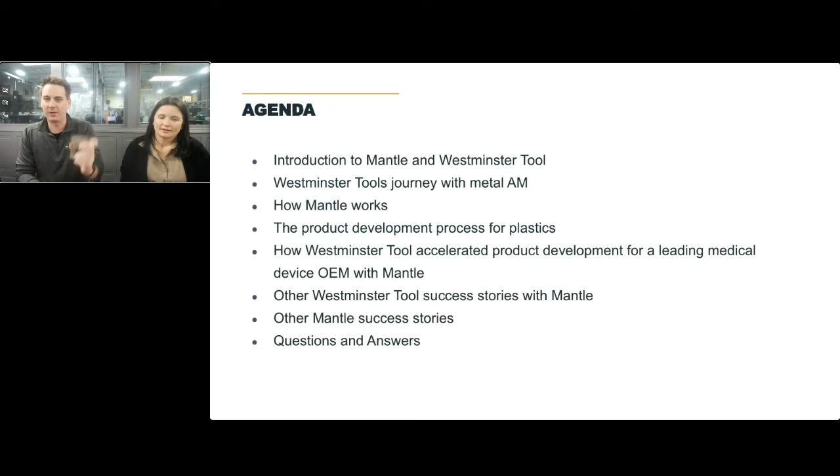Thanks again for joining us. So a little bit of a quick introduction to Mantle. At Mantle, we are a metal 3D printing company, and we have designed a technology that is solely focused on printing manufacturing tooling. Today, that means injection mold tooling, printing inserts like you're seeing in my hand here. But unlike many other metal 3D printing companies, the only application we target is tooling. We don't do one-off parts or any other applications. We are solely focused on doing this one application because we know we add value and we know we do it well. We're going to show a bunch of examples of that today and how we've designed our technology to do this. But at Mantle, we are a metal 3D printing company solely focused on the tooling industry.

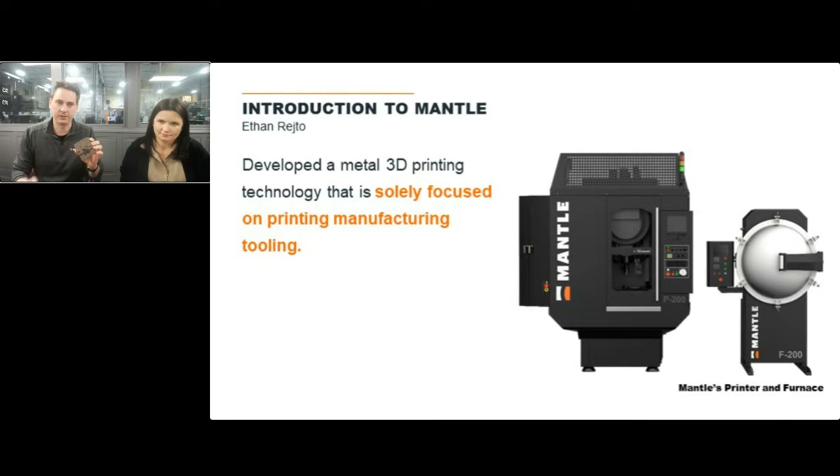Thank you, Ethan. My name is Hillary Thomas, and I work at Westminster Tool. We are an injection mold builder located in Plainfield, Connecticut.

We really specialize in Class 101 medical production mold building, typically anything up to about 32 cavities, really up to 6,000 pounds. We like to make sure that we can sample everything in-house.

We really focus on complex challenges. Traditional open and close is not necessarily what we usually go after. We're looking for things that are two-shot, micro, multicam, unscrewing, insert molds, collapsible cores - really anytime there's a complex geometry or tolerance that you're concerned about being successful with, and we take on the responsibility of building a tool that's going to get you there.

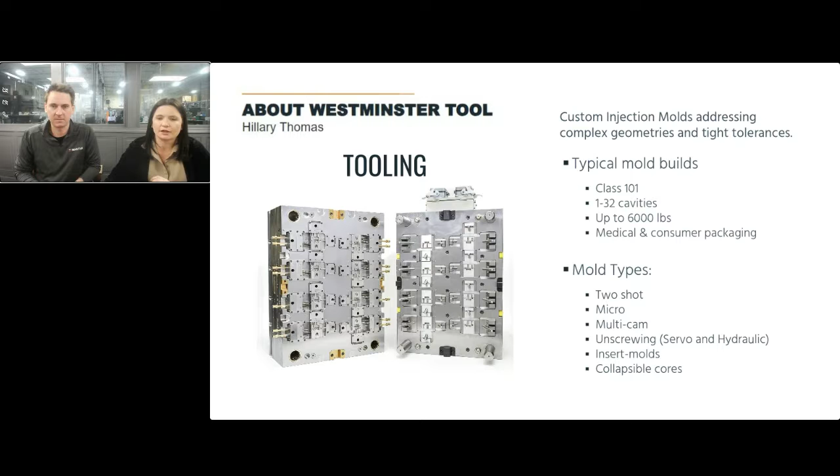A few things unique about us - we are really well known for our culture. Obviously we take pride in building high quality tools, but we changed our culture about 5-10 years ago now, and it's gotten us a lot of recognition. It allows us to be really curious about our customers' challenge and take more accountability versus making the responsibility be our customers, and it's allowed us to integrate a really hands-on manufacturing process.

We do Moldex 3D simulations on every single mold that we build. We do a really robust DFM process. We do sampling, low volume molding for our customers, and thanks to the integration of Mantle, we now do product development with our customers as well. In the bottom right-hand corner, we have won a lot of awards for our culture and some of the investments that we've made in advancing technology here at WT.

Just a quick poll to start things off here, to get a better understanding of the audience we have. We'd love to understand who are you out there, who are we talking to today, how would you describe your business. We'd love to get a quick understanding so we can tailor our content more towards that, but I'm sure we'll have a wide variety of different people on the line today.

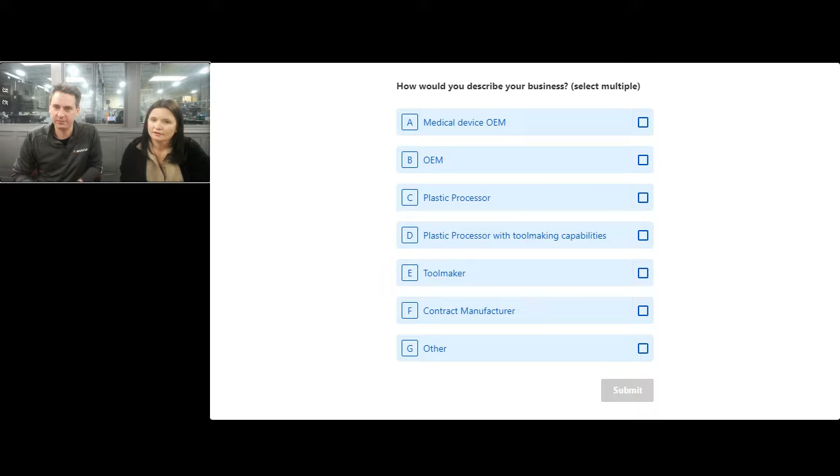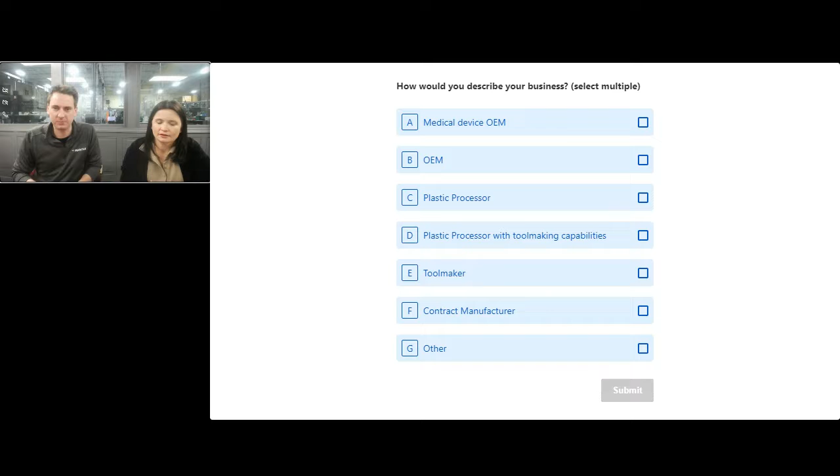I don't know if it's... hopefully it's live. There we go. Yeah, see the answers flooding in here. We'll give this just a few minutes so we can understand who we're talking to today, and then we'll quickly launch it so you guys can also see who's on the call as well. Awesome, getting some good results here. Just give this a couple more seconds. Some emojis on the screen. Yeah, we like this emoji feature. As long as they're positive, hopefully. Yeah, awesome, awesome, close this out.

So it looks like we have a good blend of everyone here - some medical device OEMs, other OEMs, plastic processors, a lot of processors with tool making capabilities, which is awesome because we're talking a lot today about tool making, and then some contract manufacturers as well, a great plethora of people here.

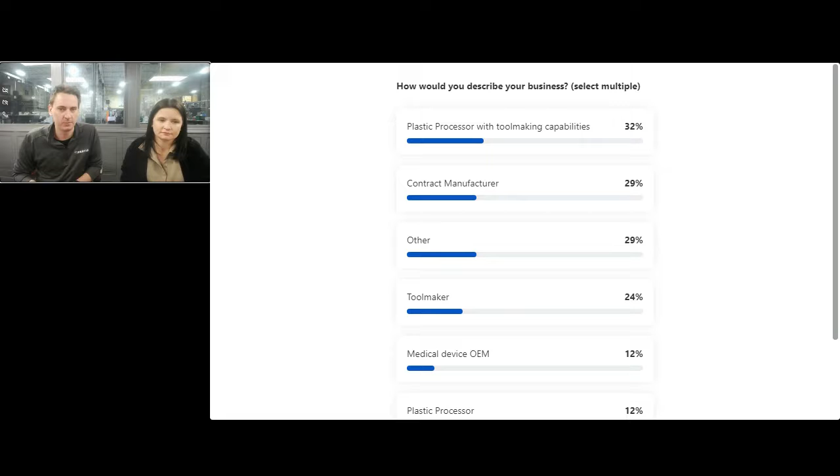Hillary's going to jump back in and talk about their journey with additive. So we have been exploring metal additive since around 2017. With our progressive culture, we really want to make sure that we're staying front of mind with new technologies. We saw a skills gap well in advance and were addressing that. We also knew that eventually metal 3D printing was going to catch up, and we wanted to make sure we were staying ahead of that.

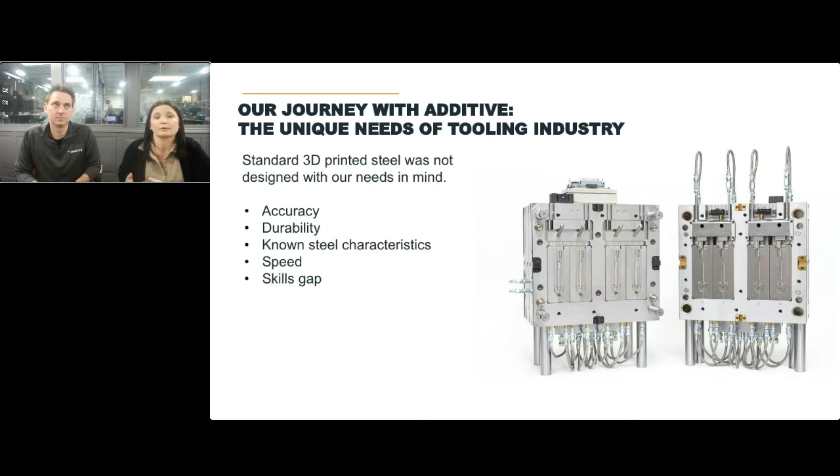The challenge we had is there was no metal 3D printing technology that truly took tooling needs into consideration. Everybody on this call has at some point worked with an injection mold - we're pretty special, we have certain accuracy, durability, speed needs. And another thing was that as an injection mold building company, we really didn't have the ability to invest millions of dollars in a piece of equipment that was going to take 2 years to learn when we were addressing a skills gap that already existed.

Specifically, we were really looking for something that had accuracy of plus or minus 3 thou or better. As you know, especially living in medical Class 101, plus or minus 3 thou in steel is a mile wide, so we were really looking to get as close to 1 thou or better.

We wanted to be able to have stable material. One of the biggest challenges we had is even if something came out within plus or minus 5 thou, by the time I touched it, it moved all over the place, and you were quickly diminishing any value that you had of printing.

We know what steels work with tooling and injection molding, so it was really important that we had familiar steels and didn't have to reinvent the wheel or re-educate our customers. In addition, with medical there are certain materials approved to be used. And lastly, we don't have millions of dollars to spend, so we really needed something on par with the traditional CNC machine we would add to our shop floor.

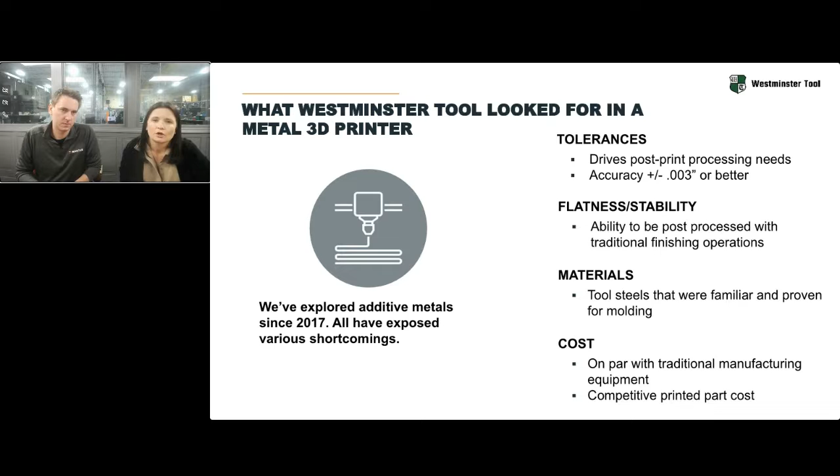So we met Mantle in 2019, and we were quickly impressed with the product samples they gave us. We did a basic machining test, kind of something similar to what you see in front of you. We put it through grind, wire EDM, sinker EDM, machining, and we were extremely impressed with both the surface finish and the accuracy.

It was coming off, Mantle comes off the printer after printing and sintering plus or minus 1 thou per inch, and a lot of times we're seeing that or better. There's a lot of ability to get fine features. Initially we could get down to a 6 thou corner radius, and now we can get down to 3 thou.

So very similar to what you can achieve with traditional operations that we have currently. Of course, printing allows us to get more flexible and creative with things like conformal cooling channels.

Huge thing for us was they were stable traditional tool steels, H13 and P2X, and they were able to demonstrate that they had the identical material properties, which was huge, especially when we're working in the medical industry.

And extremely, extremely easy to use. While I did grow up in a family business, I have not run a CNC machine before, and I actually run the Mantle machine. I think it took maybe 2 to 5 hours to train me on how to utilize it.

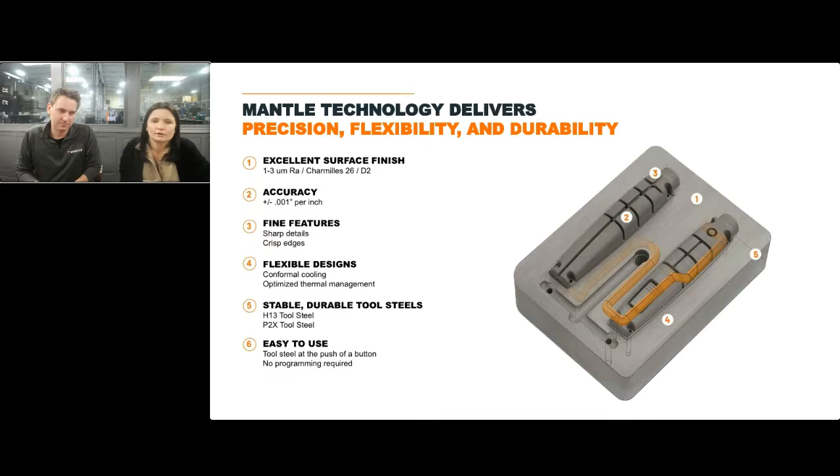So just a quick example of something we did initially. We were really interested in conformal cooling, so we wanted to take something we had on hand that we had manufactured traditionally, add conformal cooling, and see how Mantle would hold up in comparison.

So that is this insert that you can see on the page. This is it machined, and I'll hold up right next to it what it looks like off of the printer and sinter. So basically what you see for part geometry, that is as printed.

The only thing we did was put in ejector pin holes. You can see what the surface finish is there, it's similar to an EDM finish. When we molded it, there was no change, the quality was on par.

We did square up the block, machined in primary vents, put in ejector pin holes, things like burned in a subgate, but we didn't touch part geometry. And most importantly, we were able to do that 25% faster than when we had made this same component traditionally.

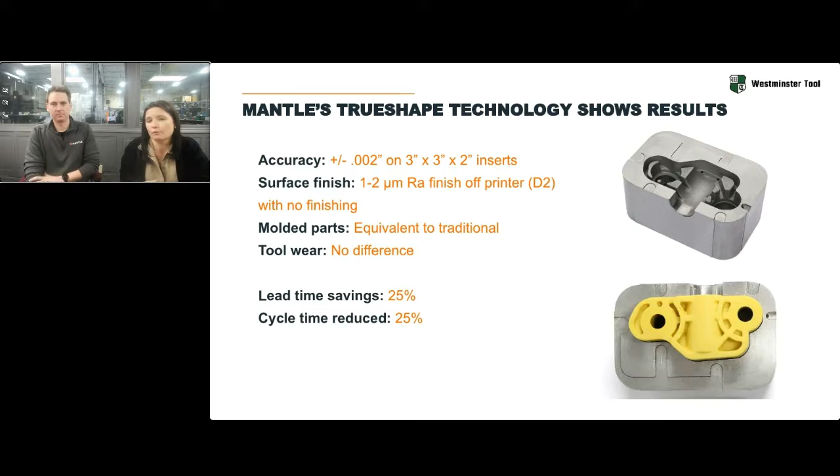And here are the conformal cooling lines that we had put in it. This part in particular was a huge influence in reducing cycle time by 25%. We also had some parts at the gate that were burning and causing quality defects that we were able to address with this as well.

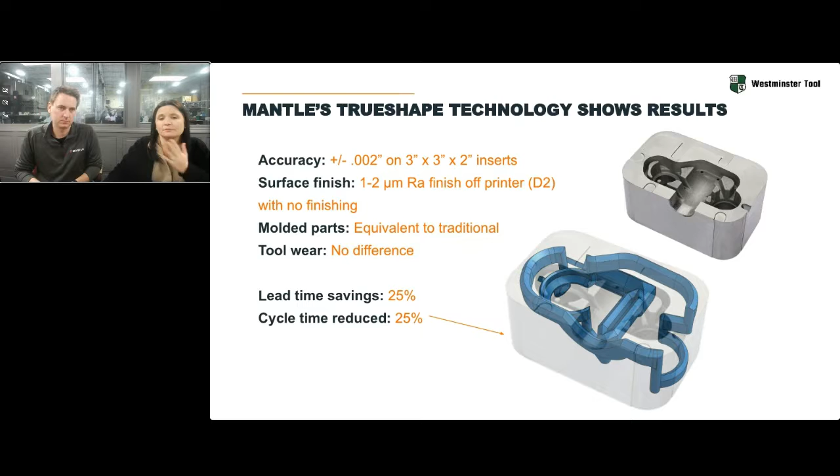So really, once we got into this example, the biggest thing that sold us was the stability. Off the printer, we were able to go in and do whatever finish machining we needed with little to no movement. There weren't any stresses left over.

With Mantle's process, they're sintering partially along the way, so the final sinter has a much smaller shrink rate, which results in a much more stable, less warped product, which was huge. Ultimately, it was why we invested in it.

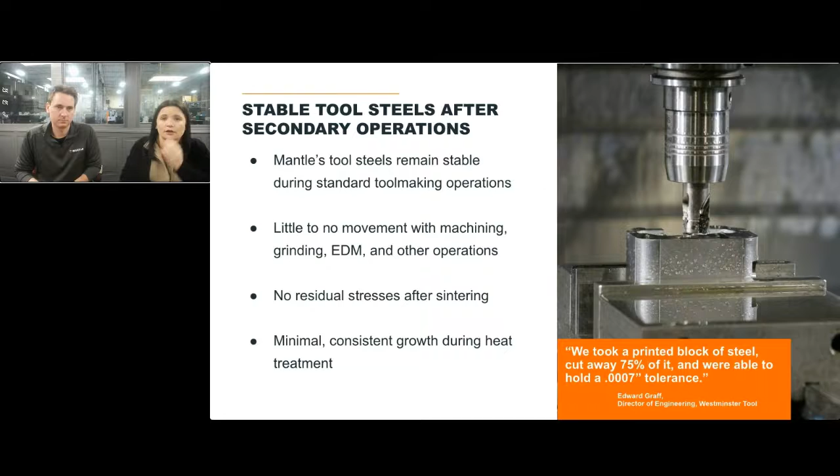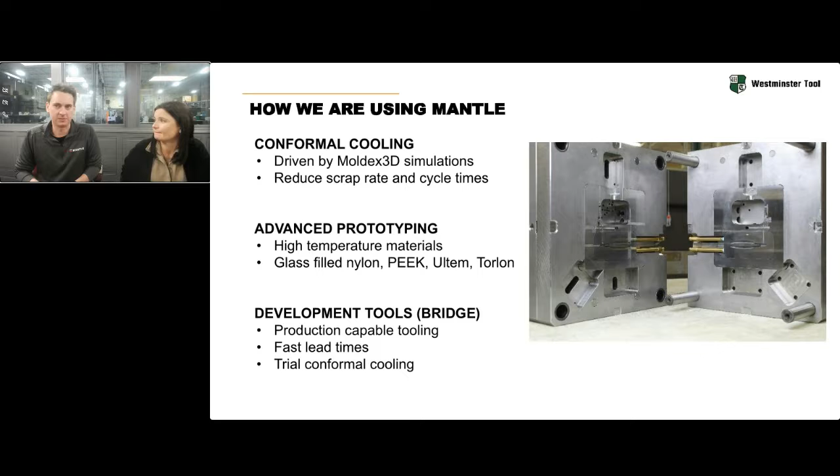Awesome, thanks Hillary. Yeah, we're going to look at a bunch more examples later on. But at this point it makes a lot of sense to explain how this technology actually works and what makes it so special to deliver on all these features that enable it to be used for all these awesome tooling applications.

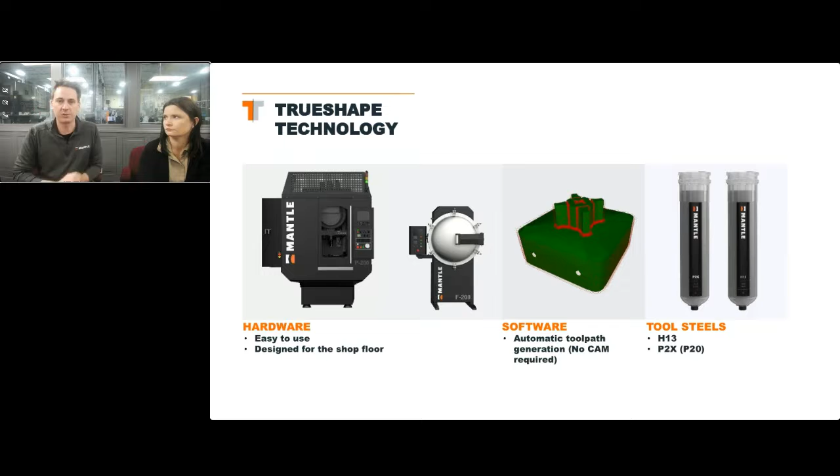What makes our process so unique is that we're not starting with a metal powder or a filament, we're actually starting with a paste, and that's what we're printing. This paste has the consistency of toothpaste, relatively viscous. It's metal powders mixed with binder and some solvent to allow it to flow. This is really a lot of the secret sauce of what makes Mantle work. Every single layer inside of our printer, built inside of that CNC, we are printing this paste.

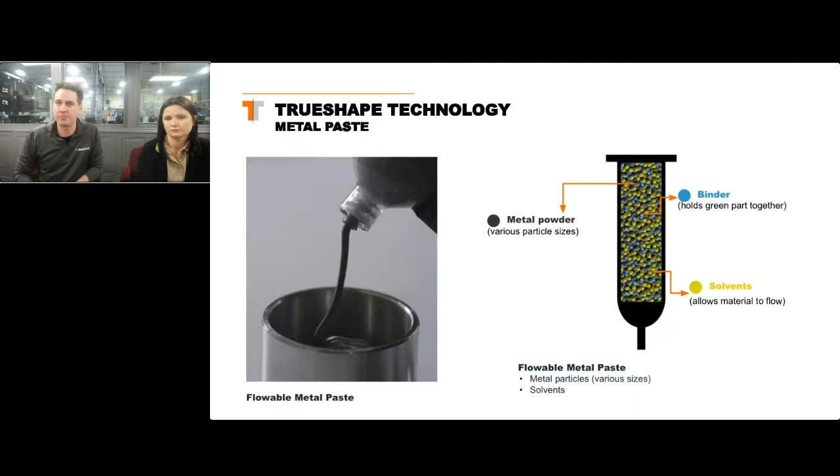This paste is just extruded out of a nozzle. It's not even heated when doing this. It's viscous enough that just with a pump, it can be extruded through this needle to lay down a layer of material. What's super critical is that after every single layer, we dry this paste material. This removes the solvent and firms up the layer a little bit, moving from a toothpaste-like material into more of a dense foam.

What's actually happening here is we're taking the part and turning it into a very high green body density. If you're familiar with powdered metal, you'll know why that's so important—it's to minimize shrinkage. We're packing this powder very densely so that when it goes into the furnace, it doesn't have to shrink as much. Another critical thing about this drying step is it makes the material firm enough that now we can machine it.

So every single layer inside of this printer, we print, we dry, and we machine. Every layer we machine perfectly flat. Every 10 layers we contour mill. Since the part is very soft when we're doing this—essentially a foam—we're taking very small depths of cut. Since we're printing and machining, we can use really small cutting tools that normally you'd struggle to use on a tool steel, like a 6-thou ball end mill.

We're using off-the-shelf cutting tools, 20 different tool changers inside the machine, so we can use a variety of tools to give you that sharp feature resolution you wouldn't get with other technologies. That's why when people pick up these parts at trade shows, they can't believe it's printed. It's a hybrid approach—printing and machining—which is why you don't see layer lines. It's why the details are so crisp.

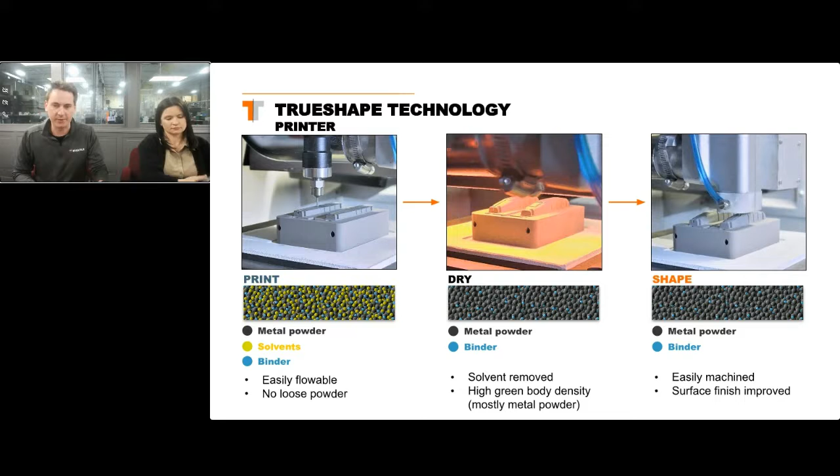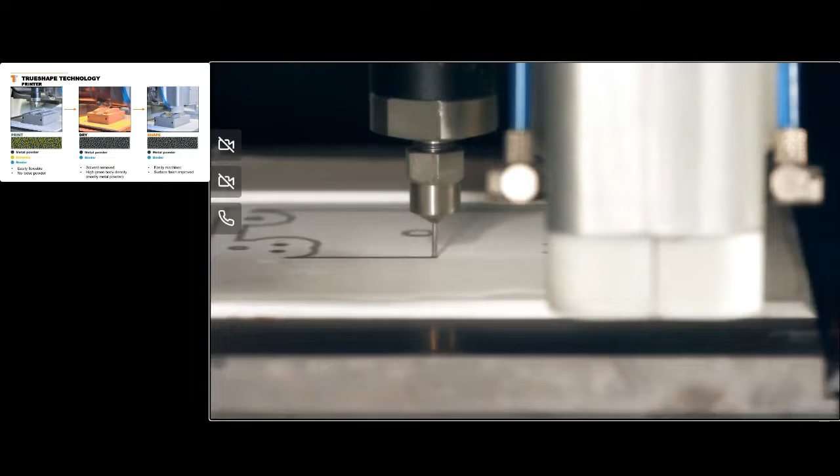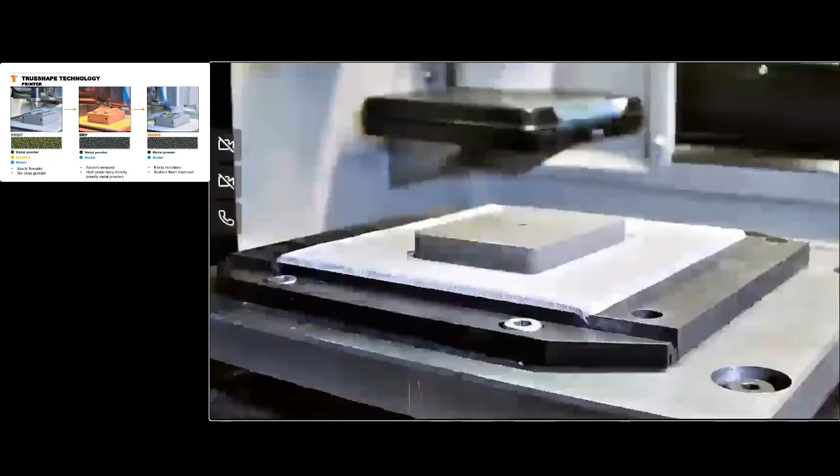I have a quick video here to show how this works, since it can be a little complicated. You can see us laying down that paste material, flowing it out onto the build plate. We come through and dry that material, then go through and machine it. Every layer we're machining flat, every 10 layers we're doing that contour milling step to refine the feature resolution. We can even add in shapes that weren't possible to print because we just machine them in. These steps repeat over a couple hours, a couple days, etc., to build up the part—all completely unattended.

After printing is complete, you put your part into a furnace—this is a sintering furnace. If you're familiar with powder metal or metal injection molding, it gets just below the melting temperature of the material. The part shrinks about 9% here, which is very low for sinter-based technologies. This is where we lose our tolerance, which is why that tolerance is plus or minus 1 thou per inch—because shrinking 9% of a 6-inch part is a lot more than shrinking 9% of a 3-inch part.

But the part's going to shrink very consistently. What's going to come out is a part with isotropic material properties, none of that residual stresses, because we heat and cool it very, very slowly. And then it's going to be fully compatible with standard finishing operations like Hillary was already showing—your grinding, your milling, your wire, your sinker, tapping, et cetera, all of that can be done. So if you need to touch up the part, you absolutely can.

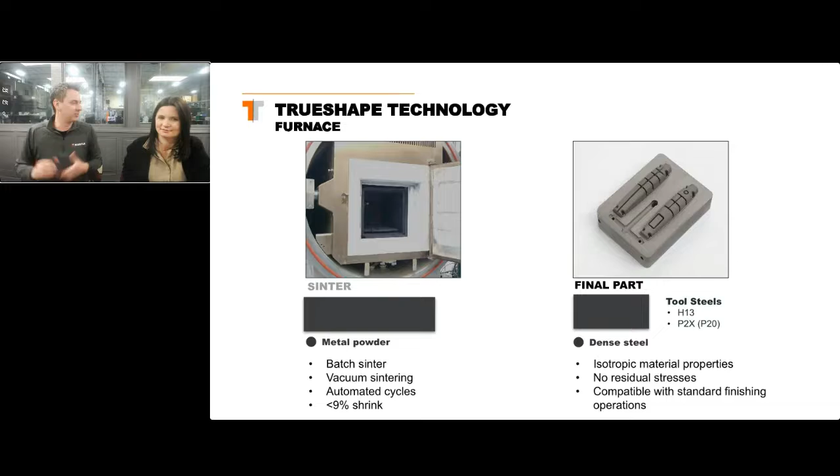And I never like to spend too long without an example. The result of this is that it produces parts that can be used with little to no finishing. For example, this is a good slide from a company, Hypertherm. You can see what they were after with printing here is all of that complex rib features on the inside of this slide was left as printed. They had to do a little bit of finishing to the outside, but what they were really after was eliminating that sinker EDM work. So it's great to talk about a fancy, sophisticated print process, but what it really means is faster parts and faster molding, getting tools in the hands of your molders and your tool makers faster to accelerate lead times and shoot parts with little to no finishing.

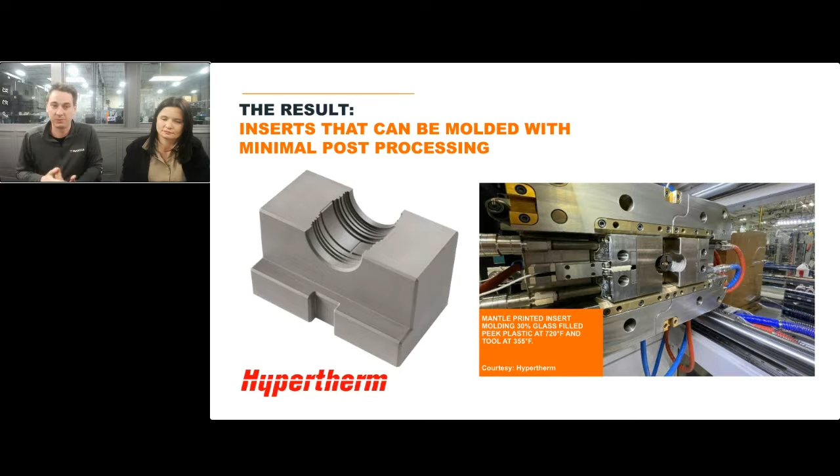Talking a little bit now about one application that we've really seen a lot of traction in: accelerating product development, especially in this mid-stage of product development of plastic parts. We'll talk a little bit about this, and Hillary has a really good example about how they've done that.

But when we look at the product development process, we see it's very, very fast in the early stages. You're working in CAD, you're working in simulation, you're maybe modifying design every couple of hours. You're getting 3D printed parts in plastic, maybe in an hour or a day overnight, and you're able to iterate very, very quickly, and that's great. But then eventually, just looking at a part on screen or just getting a plastic 3D printed part is not good enough.

You need to actually validate the function of this part. Here's where we need our end-use materials. We need a production representative manufacturing process, because that plastic 3D printed part is just not going to cut it when you're going to market and going to produce this in mass quantities—you have no idea how the part's actually going to perform when you move into production.

We find that this is especially challenging for highly regulated industries and industries that work with engineering plastics, like the medical device industry, where they have to go through regulation and trials, using PEEK and glass-filled materials, acetals, polycarbonates that can't be molded in aluminum or are much harder to process. We see that slow down even more.

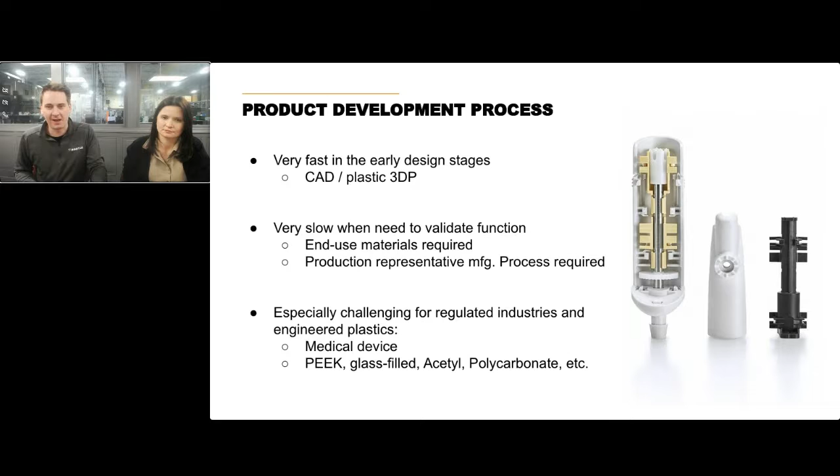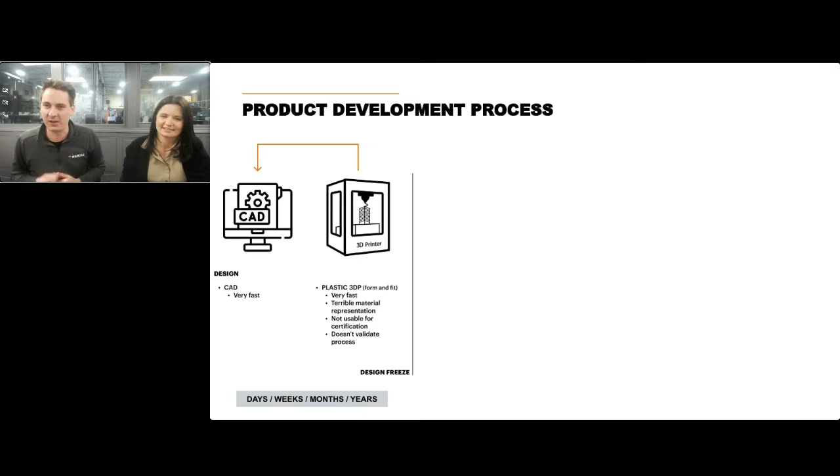I put together a kind of timeline here. Like we just mentioned, in the very, very early stages you're moving very, very quick, iterating hourly almost to really develop, try fast, fail fast in this step. Where things start to kind of break down or start to get longer is during this functional validation.

There's a couple of different processes people commonly use for this, and they all have their pros and cons. Of course, you could just machine a piece of plastic. That's very fast. It doesn't give you much information about the actual manufacturing process you're going to go to volume with, which is most likely going to be molding, but it does give you somewhat of a material representation pretty early on and pretty quickly.

Another option would be a prototype tool, like an aluminum tool or even a plastic tool. This is going to give you a better material representation because it is the end-use manufacturing process, but there are still some discrepancies between the tool steel tool and this aluminum tool. So it doesn't help you validate the process much.

Another extreme or example would be to use a prototyping service like a Protolabs or a Xometry. Those can be very, very fast. You're getting a pretty good material representation, but you're not learning much about the process here because you're not doing the molding yourself or working with the molder—they're really just selling you end-use parts. So you're not learning too much during this process as well. But these are a couple of the different ways people are usually trying to validate the function of a plastic part in this process.

Of course, once that's done, now we need to move into actual volume production or process validation.

We need to move on to steel tooling because we need to make sure that the parts coming off the steel tool are meeting all the requirements we need. We're not going to be able to use that aluminum tooling anymore, we're not going to be using plastic 3D printing, and we're certainly not going to be machining parts either.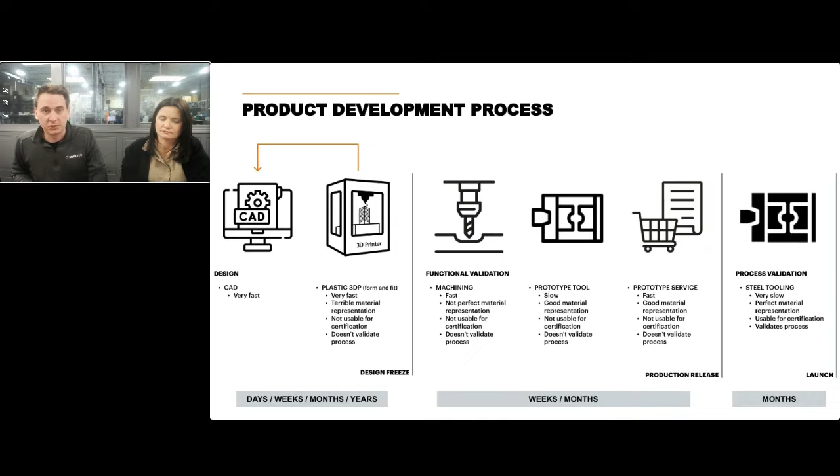So if steel tools are so great, why wouldn't we use them in production? You're getting that end-use plastic material, which is manufacturing equivalent. You're able to use it for certification and trials. Something Hillary will talk about later is validating the manufacturing process, validating that the mold's functioning. You're actually able to start to optimize these molding process parameters, things like temperatures and pressures, cooling rates, cycle time, shrink rates. You're learning all of that in this prototyping stage because you're actually doing it with a steel tool.

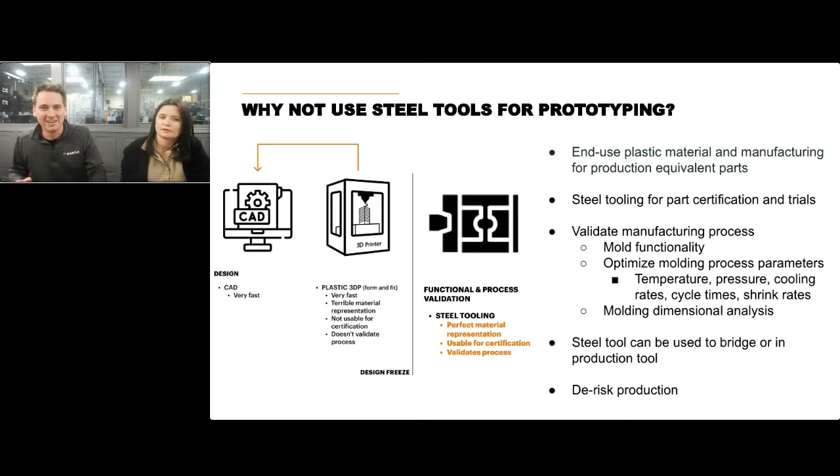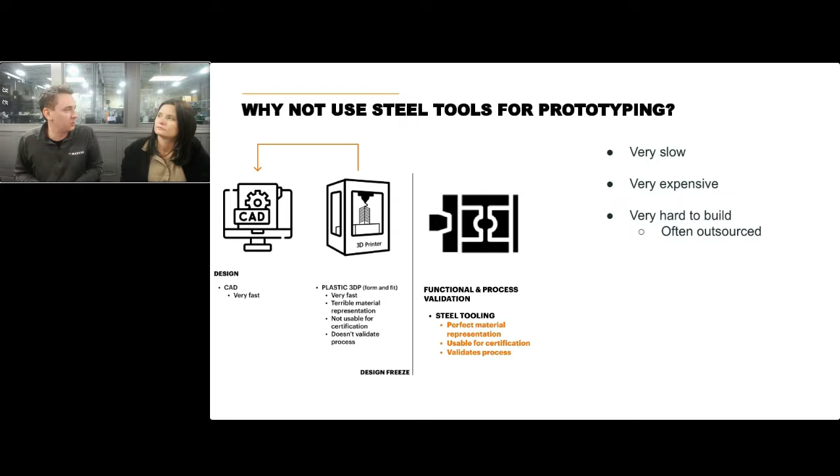Additionally, they could be used to bridge or in production, ultimately allowing you to de-risk production. And I'm sure for everyone who's worked with tooling and injection molding, steel tooling is very, very slow to produce, very, very expensive to produce, and very, very hard to build. It's often outsourced for a lot of companies because they're not used to working with high hardness materials. So ultimately, it's really just not an option to be working with steel tools early in the prototyping stage, even though there are so many benefits to doing that early in product development.

So ultimately, what Mantle is allowing a lot of people to do for the right applications is to work with tool steel tools during the prototyping stage. Mantle allows you to often produce steel tools in prototyping cost and prototyping speed, and Hillary will give some examples of this, and I have a bunch of examples as well. But ultimately, less time to produce tool steel tools, less cost to produce tool steel tools, to allow you to de-risk that production and get involved much earlier in the process with steel tooling to ultimately de-risk when you move into volume. And Hillary has an awesome example of a company that's actually done this recently.

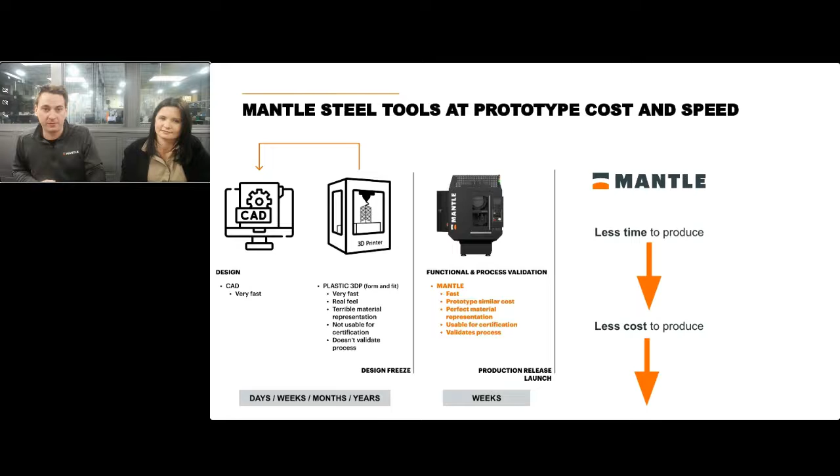But before we move into that, I'd love to know, everyone on the line here, how are you prototyping plastic parts that you're moving to production with today? Feel free to pick a bunch of these examples, but I'm curious of those different processes we just talked about, which ones are you using today?

Yeah. Awesome. This is always interesting to me to see who's using what. And I think a lot of times we end up using multiple.

That's why we left this so you could check multiple. You usually might start with just 3D printing a plastic part, machining, something like that. But ultimately, we all need to shoot plastic into a mold in order to understand how things are going to function. Her and I were talking about this earlier, that all of these methods have their pros and cons, and they all have applications. It just really depends on the part and the situation. They all certainly have their different pros and cons, as Mantle does, and you'll see today for the right scenarios and the right parts.

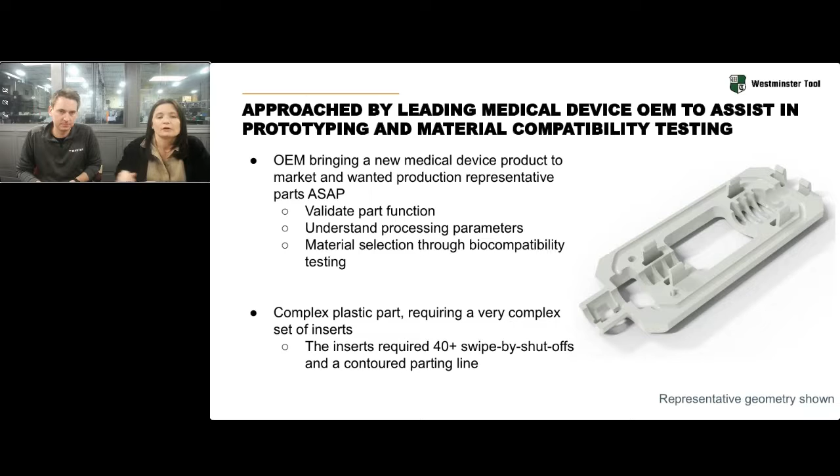To give you a little data behind it, we started by printing and sintering the parts, and I'll talk to you about what we did to finish them. We were pretty much shooting for finishing the geometry, taking off what we take off of Mantle. We usually CMM, get a feel for where everything is, and decide what we want to touch up.

The print took 6 days. That's only about 2 hours of attended time, prepping a build plate, moving it, starting up the printer, moving it over to the furnace, removing it from the furnace. It's 2 hours or less. It was just under 2 days of sintering. Then we had 2.5 weeks of post process, which included tool making and assembly. It was 55 hours of time to bring it to completion.

What did we do to the blocks after they were printed? Well, one thing we always do is square the blocks. We always leave additional stock around the perimeter, and we square that up either by grind or hard mill. We were hard milling our primary vents, depending on the tolerances. A lot of times we're putting those in afterwards. We wire EDM'd our ejector pin holes, tapped our water lines and bolt holes, and based on the CMM data, we looked at shutoff areas we were concerned about and did some hard mill in those areas to get a strong shutoff.

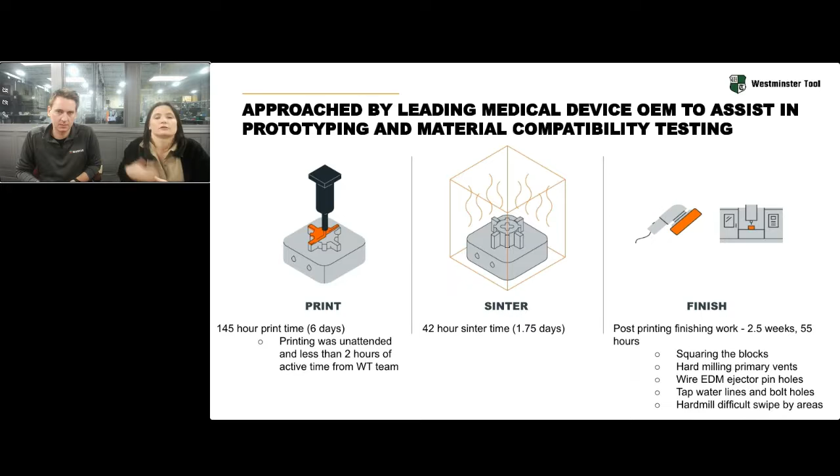The result, and this is a picture of that representative geometry printed, we were able to manufacture and put parts in our customers' hands within 4 weeks. If we were to have to manufacture all of those electrodes and burn that geometry, I think the best we could have done is 8 weeks, probably longer.

We saved 110 hours of manufacturing time, which is huge, especially when somebody comes to us and we're already full on the shop floor. It's pretty hard for me to slide something in like this and take over my EDM department without pushing something else out of the way. So we were able to do this completely unattended, other than those 55 hours.

Since completing this, we've molded over 7,000 shots for them, utilizing 2 different materials to help them select what material would be in the actual production parts.

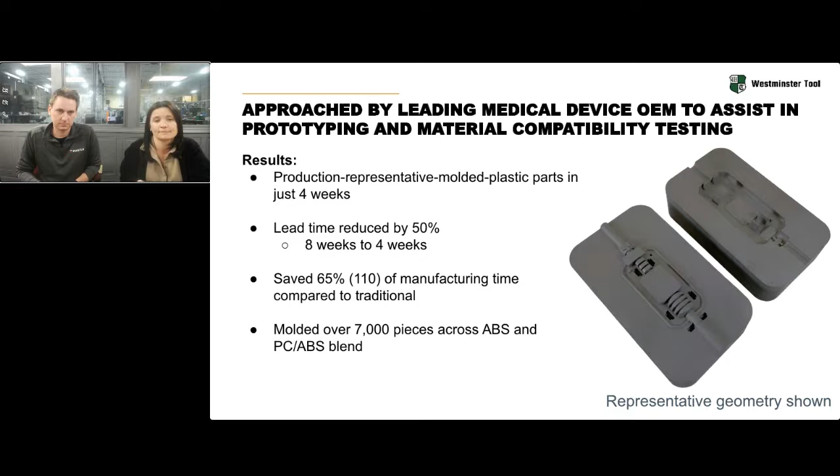The lead time that we were able to get them was great, and the quality is what most impressed our customer. There was little to no flash, and all of our critical dimensions were within plus or minus 3 thousandths. Some were even better than that.

But the real value we gained was the lessons we learned. In this tool in particular, we had some sticking issues. We learned about different surface finishes we could utilize to help with this, using A-side assist for ejection. We found that the product actually shrunk more in the length, so we were able to identify that with the customer and integrate it into the production tool.

In this case, the customer had gone through so many trials and really liked the product they had in their hand, so much so that they said, we're going to change the overall length dimension to match what is currently in hand.

All of that translates into our design time, which we typically take 5 weeks in a Class 101 mold design. We're looking at things like, how is this going to shrink? What are our critical dimensions? How are we going to be successful? What are the risks, and how can we mitigate them? How should we inject? How should we eject? We're looking at all of that.

We were able to save on almost all of those activities because we did it at this point, during the development tooling. So not only did we make the development tool, we molded it and learned a ton of lessons, but we were able to save our customer over 25% of the time and cost in their design. In this project in particular, it was close to 40%.

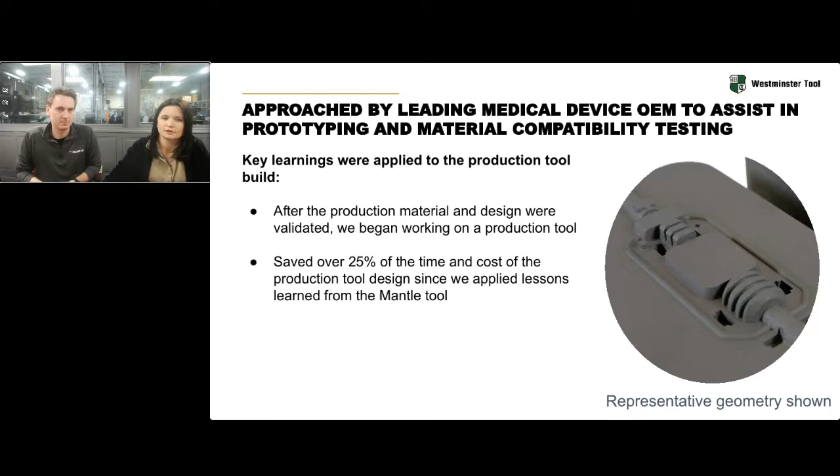Obviously that's the latest and greatest kind of example for me to show you. Ethan had a goal today of trying to focus on product development, but I did want to show you some other things that we've done with the technology over the last year.

You may have seen this, it's a really great example that we utilized. There was a compounder that had a new renewable-sourced glass-filled nylon they wanted to release into the market. They hadn't molded it yet and needed to understand how it molded. They also wanted some type of medical representative part they could put in customers' hands so they could see what the material was like and not be turned off by the fact that it was a new type of material they hadn't seen.

So they came to us prior to a trade show. The trade show was in 5 weeks, and they asked if we could reverse engineer, create a product, design it, make the mold, and mold 1,500 parts for the trade show. We did that utilizing Mantle, and we were able to get 1,500 parts in their hands within 3 weeks.

We basically just took their needs and designed it in a way that would be perfectly successful for Mantle. We utilized an in-house frame. It was 5 days for us to print and sinter these, 7 days to finish machining.

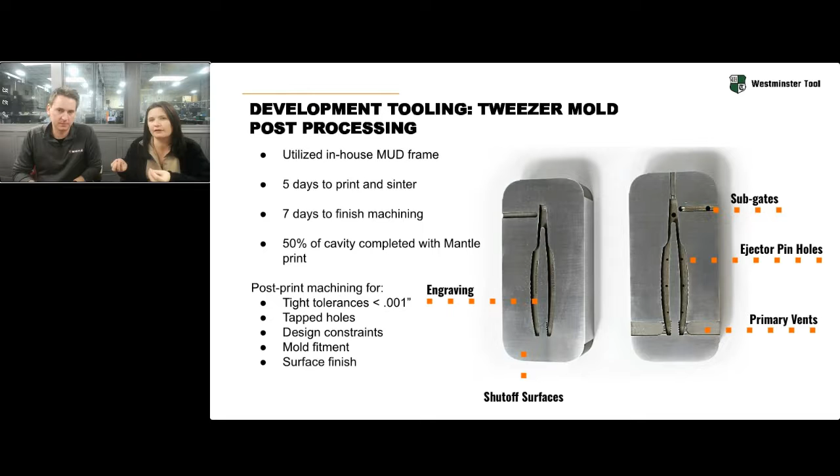But it is 97% dense, so it's not exactly perfect, but it's pretty close. What you see in your hands won't be a shiny finish. What comes off the printer is very similar, I think, to that perfect kind of matte plastic finish, which for a lot of applications is fine.

And again, in both applications, they weren't asking me to hit a surface finish. They wanted a part in their hand, and that was the only reason we would ever polish these, really for ejection.

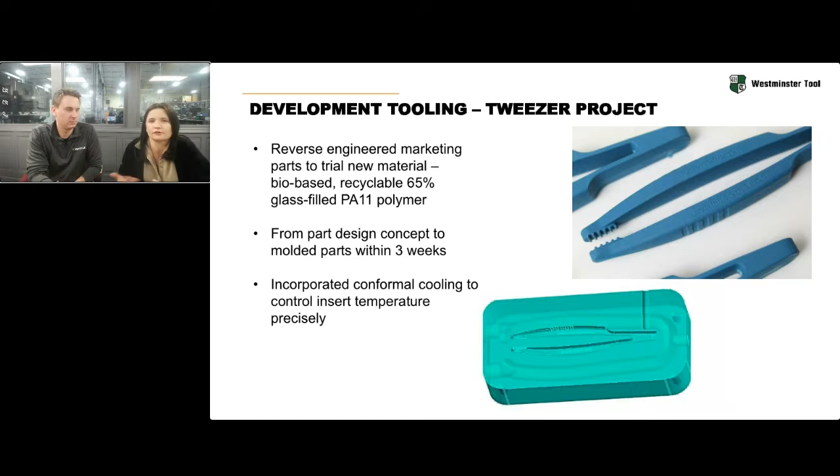Another example was a case study we worked on with Pepsi. Traditionally, they have a prototyping lab, and they're trying to turn around different iterations of bottles very quickly.

In this case, they were looking to do a lightweighting. I just want to hold it up for you so you guys can see. So this is the base of a blow mold that they were working with, and they were trying to turn around iterations quickly within a week.

But after they turned around an initial iteration, if it went well, it needed to go into production simulations where they would run 10,000, 20,000 shots, to trial their production lines. Would the automation work with it, et cetera? So they were trying to accomplish a lot.

In their existing format, they were using a plastic 3D printed base, and it held the heat a lot. After a certain amount of shots, it started to get a lot of blushing and cloudiness that you would see, and that quality really impacted its ability to integrate with automation.

So what we did is we printed them with Mantle. We did very minimal post machining. We ground the top and bottom just for shutoffs, and we hard milled the OD base. So very little machining that we did afterwards, and this was something that we were able to do.

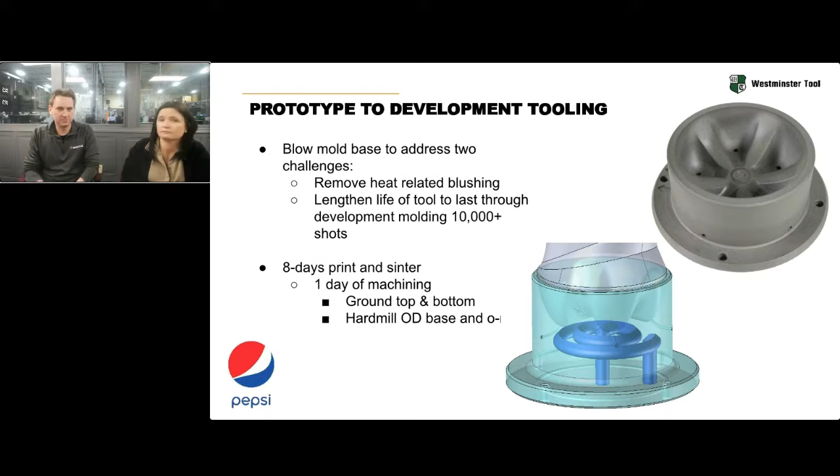Awesome, thanks for those examples. And before we wrap up here, I just have a couple more examples. I looked through all my examples and thought about which ones are relevant to accelerating product development.

Another good prototyping tool example here for another medical device component. I actually have it here with me again. You'll see that common theme of those deep features that would require a lot of EDM work. This was actually a tool for prototyping both plastic parts in acetal and radel.

So they wanted to use steel tooling here. Radel was molding at high PSI as well as high temperature. Acetal actually emits a corrosive gas during molding, so the desire was to use some tool steeling here. They were looking to get, similar to that production representative tooling, production representative parts, so wanted to use that steel tooling here.

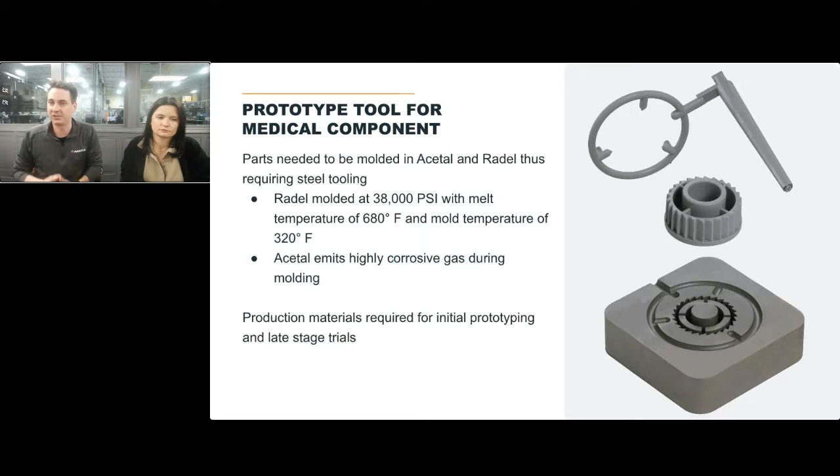Here they actually used the P2X material, or P20 equivalent material. This was earlier on in the Mantle process, printing in about 62 hours, of course all unattended.

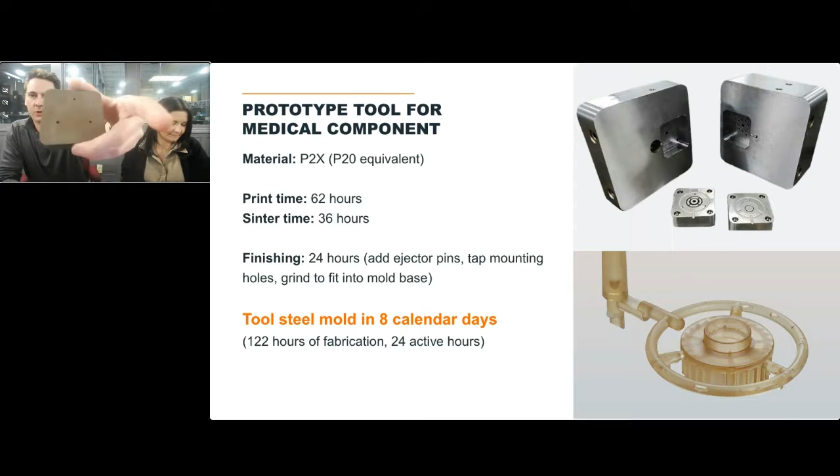So in about 2 or 3 days here, it went in the furnace for about a day and a half, and then did 24 hours of finishing on these tools, which was finishing those ejector pins, actually doing the tapping on the mounting holes, which are on the bottom surface here, and then grinding it to fit into the mold base.

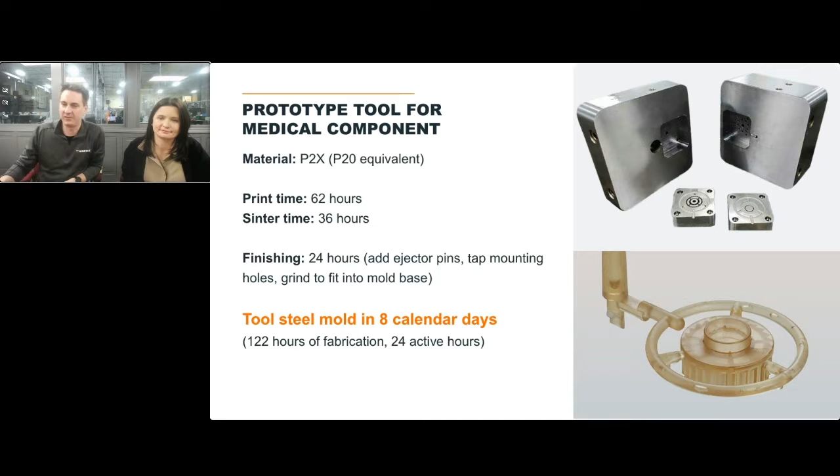So about 122 hours of total fabrication, which they did in just 8 days, of which only 24 hours were active. We're hearing a lot these days about labor and the challenges of hiring tool makers, and the ability to do just 24 hours of tool making time instead of hundreds of hours is obviously really beneficial in these applications.

So ultimately, a huge reduction in lead time from outsourcing, from 7 weeks down to just 8 days. The amount of active time down from 148 hours down to 24 hours on these tools. A 50% cost reduction. The insert was accurate within 1 thou as printed, without any additional finishing. All the molding surfaces were left as printed, so you're seeing that sort of matte finish on the parts here, that D2 kind of sinker EDM style finish. The molded parts passed all their visual and dimensional requirements.

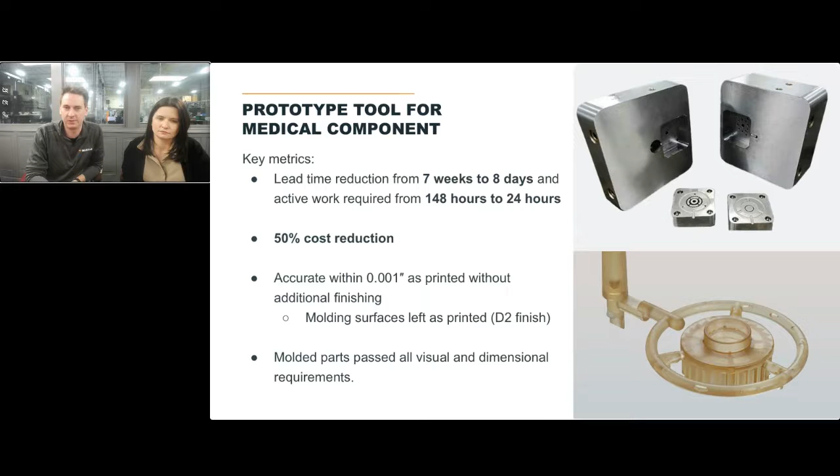I'd love to look at Mantle in terms of the reduction in steps involved here versus a traditional process. In a traditional process, if you've built tooling before, there are so many steps involved to produce these highly complex and highly accurate tools. With Mantle, we're cutting out so many of those steps. So here, very early on, there's the printing step, the wire EDM for those ejector pins, and then the final finishing. From 148 hours of active time down to just 24 hours, which dramatically accelerates time to market to be able to prototype production tools this quickly.

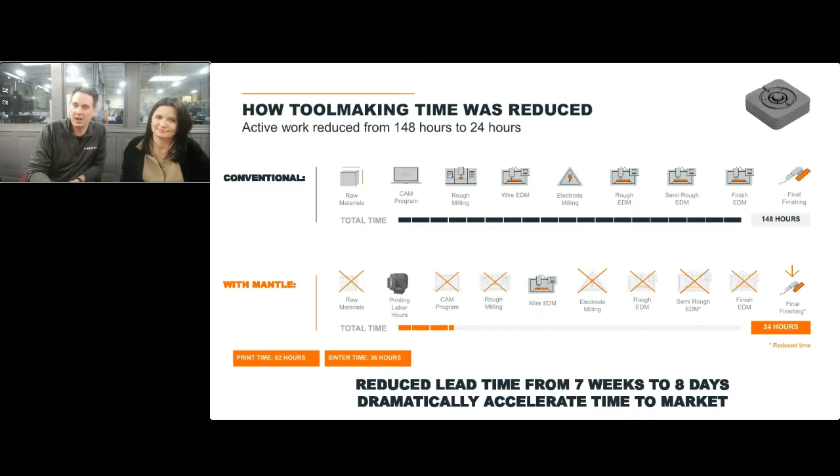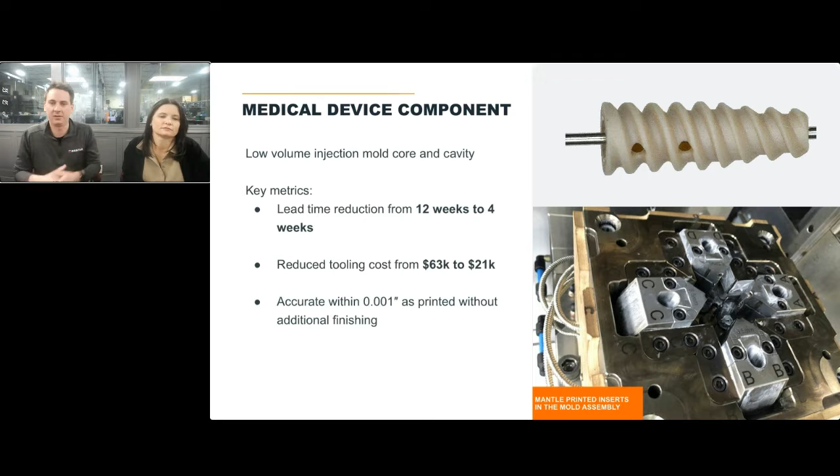Another good example here, some slide components. You can see the 4 different slide components here. Again, a huge reduction in lead time on these components, from 12 weeks down to just 4 weeks, and a huge reduction in cost as well. Again, that accuracy is what's enabling this, the ability to produce all of these slides within 1 thou as printed without any additional finishing to that feature detail. I believe there was still some wire work to fit these into the total tool here.

A couple more examples before we wrap up. This is a good example of a part that still required some EDM work after printing, as well as some polishing. This is actually for a dental application, an overmolding application, where they're overmolding a 60% glass-filled nylon.

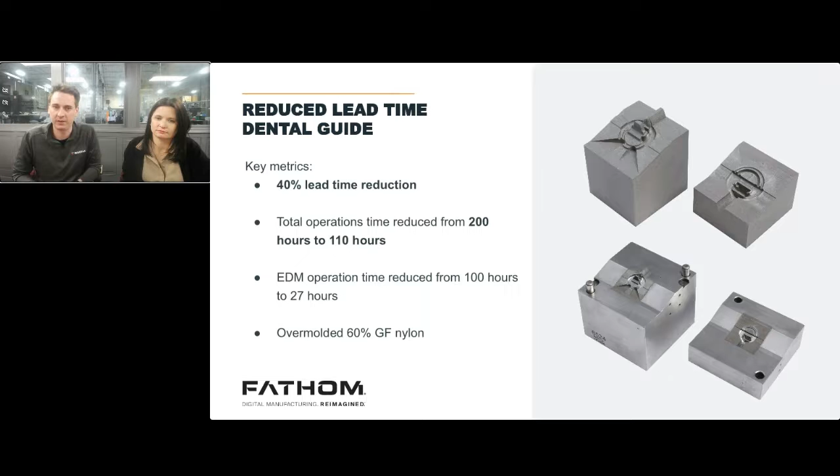Here, there was a 40% reduction in lead time. The total operation time was reduced from 200 hours down to 110 hours, so they shaved a lot of time off of the tool build. Most of this was the result of removing the EDM. There's a lot of features on this part that would require a lot of sinker EDM time. It was going to require 100 hours and a ton of different electrodes. They still did some EDM work afterward, which I'll show you here, but they went from 100 hours of EDM down to just 27 hours. It's really important to know that you can still do that burn work, that finishing work.

But as you can see here, they just overprinted some of these features and then did one final finishing burn, instead of having to burn all those features from scratch out of a block, which would have taken a lot longer with that milling and burning process. Of course, like the common theme today, the desire to remove and eliminate EDM is super important.

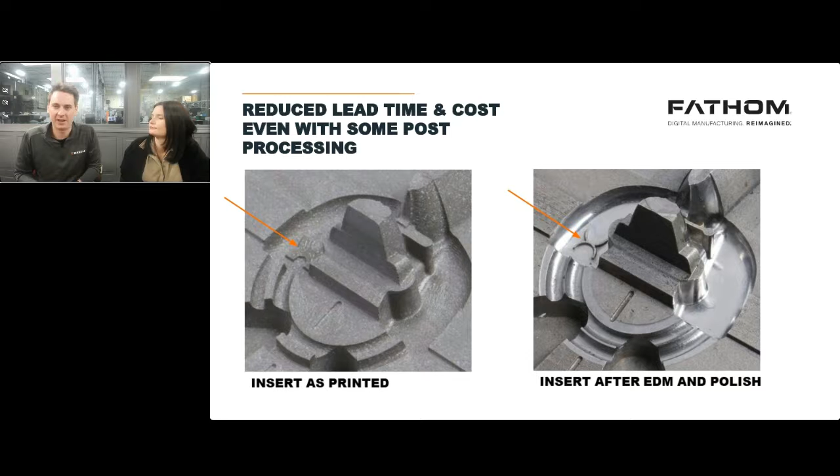Last example we have here today is from Westec Plastics, a great customer of ours in California. This is a good example of where they were actually in the process of building a multi-cavity tool for one of their medical device customers. As things happen, the customer decided in the middle of the tool build that they wanted to make a change, and Westec needed to validate this design change as quickly as possible so the production tool could get back underway. To do this, they wanted to build just a single cavity tool to evaluate it.

It's not an overly complex shape, as you're seeing here. It's something that certainly could be built traditionally, but the value here is being able to just throw this on the printer within an hour, get it printing over the weekend or holiday, and not disrupt their normal shop flow, to be able to print an H13 tool like this.

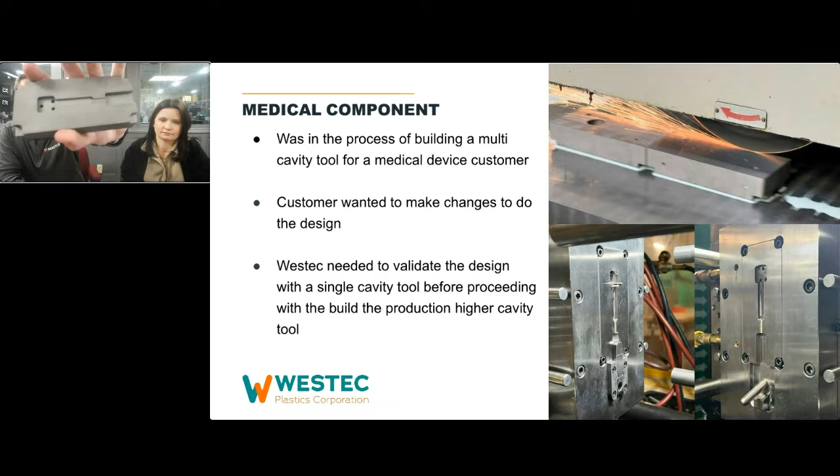It only needed a little bit of finishing work to get it up and running, so there was a 50% cost savings here. They estimated this would take about 40 hours to build traditionally, but with Mantle, there was only 10 hours of finishing work. For them, that was a huge advantage, to not have their tool makers disrupted for 40 hours on something like this, but only spend 10 hours after printing to do that.

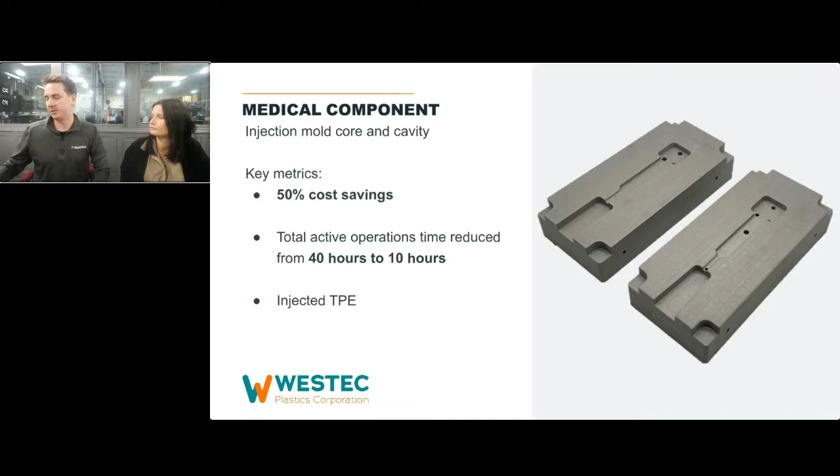Here they were injecting a TPE material, so I always like to include what kind of material was being molded. One last quick example here, this deodorant core.

People are always asking us, is this material as durable as the tool steel I'm using today? With 3D printing, it's probably going to last for 100 shots or something like that.

This is kind of our gold standard durability example that we did with Tessy Plastics. They were actually running a 32 cavity tool for molding these deodorant sticks that are in the center of your deodorant tubes, hopefully we all used this morning.

After over 1.65 million cycles, both the P20 and the H13 inserts are still running. That number's probably even higher now, and they didn't see any unexpected wear on the inserts, which is a great example of how it's not just a prototyping insert, it can be used in volume, absolutely.

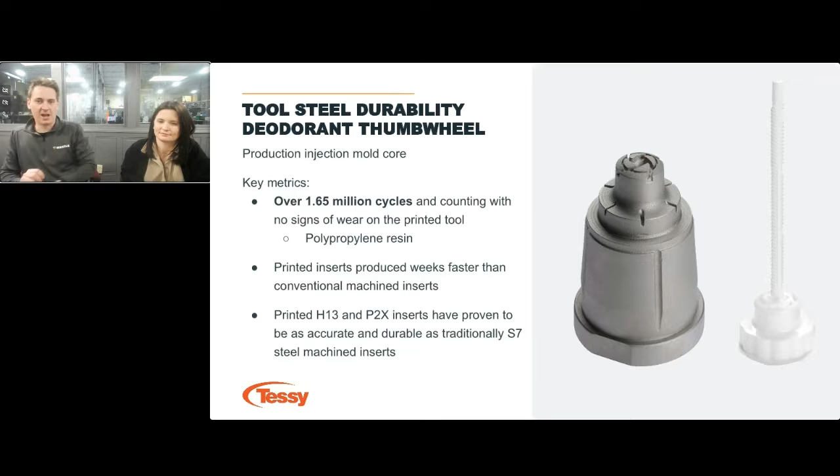But of course, delivering that lead time and cost savings is always the benefit. I think that's all we have for you here. Thanks for sticking with us through that, there was a lot there, a lot of different examples.